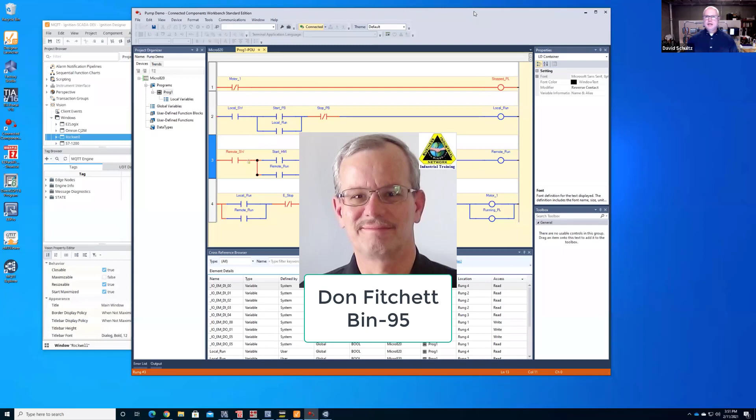So before we get too far into this, just some shout outs. One of them is Don Fitchett at Bin95. He does a tremendous amount of training. I've been linked in with him for over a decade. He's just been phenomenal to help when I have PLC questions or just overall logic control. He has a lot of modules you can just buy for training and the like. So if you're wanting to get into PLCs and learn how to do it, Don would certainly be somebody I would recommend.

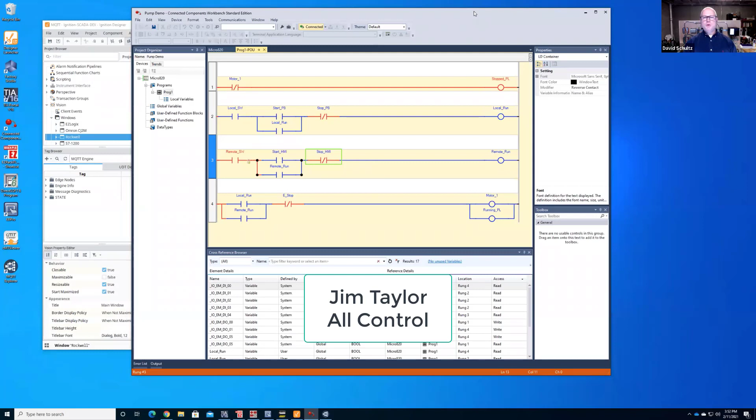I was just going to do four PLCs today. I was able to get an Omron in at the end, a little CJ2M. So thanks to Jim Taylor at All Control - there's actually a client we're working on doing something with, and that's sort of where this solution I'm going to show you is exactly what we're looking at doing with this particular client. But I appreciate them letting me borrow one of their PLCs. And of course, Selam at Opto22 on the Groov Epic.

She's just been extremely helpful in getting some of the stuff done. I'll explain why when we get there, because a lot of your logic control is pretty straightforward. But once you get into how they do it with their strategies and their charts, it's a little bit different animal. Once you get in there and understand it, it's like, oh, this is pretty cool. So that's what we're going to do.

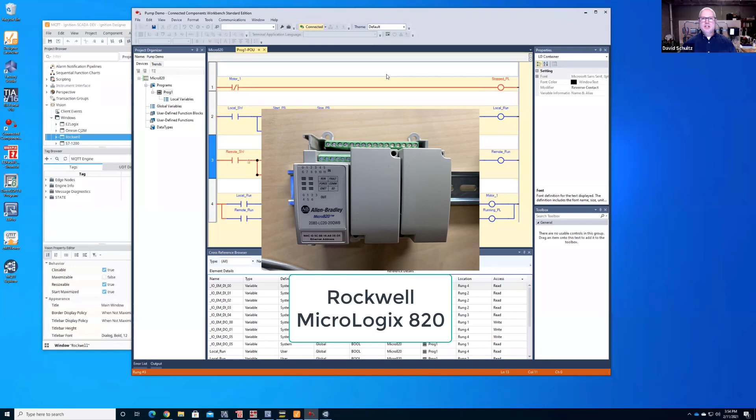So I've started here - this is a MicroLogix 820. What I'm going to do with this is I'm actually running a Kepware instance over here, so I'm now bringing all the tags in through Kepware. It's an OPC UA server. I show this for a couple of reasons. One, there's a lot of people that use OPC and Kepware for getting tags out of their PLCs. So that's how I'm able to connect down to it.

I also want to show it because while I'm going to be publishing everything into an MQTT broker, I want to be very clear that control still needs to be at that OPC UA or directly with that hardware itself. While yes, you can do control with MQTT, it's really not recommended, so I just want to be clear on that.

The other reason why I'm using Kepware is they have this neat thing called an OPC Gateway - or excuse me, an IoT Gateway. That's what we're looking at here. These are the tags that I've actually brought in. So what we're doing is going from that MicroLogix 820, bringing it into Kepware for publishing back out using the Kepware IoT Gateway. I'm going to get these tags publishing real fast.

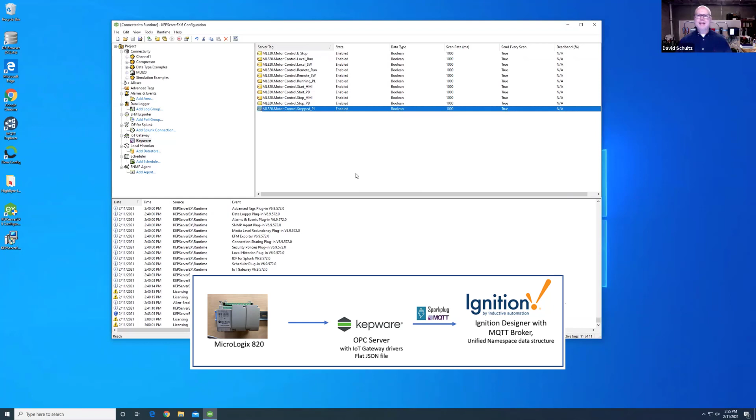What this IoT Gateway does is publish in a flat JSON. It'll take all of this information and give you the tag name, the quality, the value, and whether it's good or not. I'll show you what that looks like when I'm publishing it. I'll do a little Kepware update. Now you can see here's the tag, the value, whether it's on or off - true or false - and of course the time that it came through.

You can see exactly that we are publishing all these. I'll turn this off real fast just so we don't continue to update all that information. Now we're only going to - again, it's report by exception - only publish data changes, so we're only going to bring in the data that changes through there.

What I'm showing you here is that when you actually look at the tag that's coming in - we'll get down here - this is coming from my fictitious Highland plant. Now it's just bringing in this utilities, compressors, and here's the motor. Let me expand this out a little bit - you can see this is a pretty good sized JSON payload that's coming through, and that's the timestamp.

So what I'm doing is bringing it in, running a Python script on this Kepware update, and anytime something changes, you'll get a tag update in through. Not as elegant as some other solutions I'll show you, but the idea is that you can at least get this value published inside a unified namespace.

Coming down, you have your enterprise, your site, you get into the area, kind of a line, if you will, and what we're on - it's just a motor in this particular case. So just one way of doing it, bringing in data, trying to make it available, and it's absolutely doable utilizing that solution.

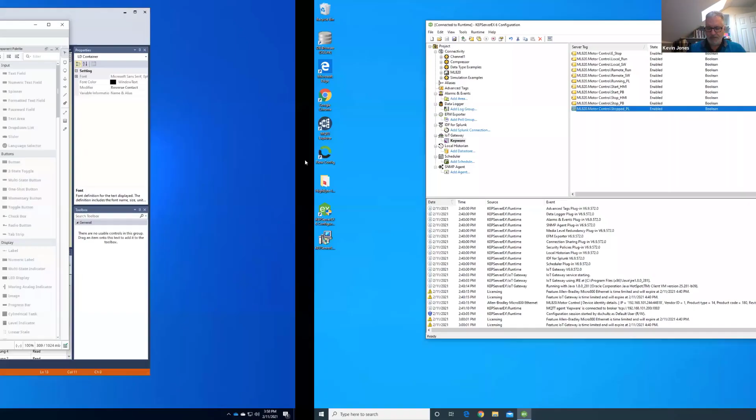And where was that IoT gateway again? It wasn't clear to me where it is. Is it in Kepware? It's in Kepware. And that Kepware is then publishing the flat JSON to Ignition.

Yes, it is. So I'm using just the Chariot SCADA ignition, or MQTT server, right here in Ignition. That's where it's all publishing. And you can see I'm only updating if something should change.

So you see a lot of those tags disappeared when I just clicked the refresh. That's just because this is the most recent data that we have. But you can see that it turned it on, it turned some stuff off, and what the status of everything is. So you can see all that.

And again, it's nice that all of a sudden, through just a JSON, you can keep track of how often a motor cycled through, or did a compressor start and stop, those types of things. And you get those times. You know the exact tag, on or off, and anytime it changes, this will publish that data out to the broker, and you can subscribe to it, and then you'll have that data.

And so I have a couple other questions, and I want to be conscious of time so this video isn't too long for everybody. How many other samples do you have so that I know what level of questions to ask here? In terms of samples, what do you mean by samples?

Like you said, this is sample number one. I have five. Okay. Are they all kind of similar to this, or are they a whole lot different?

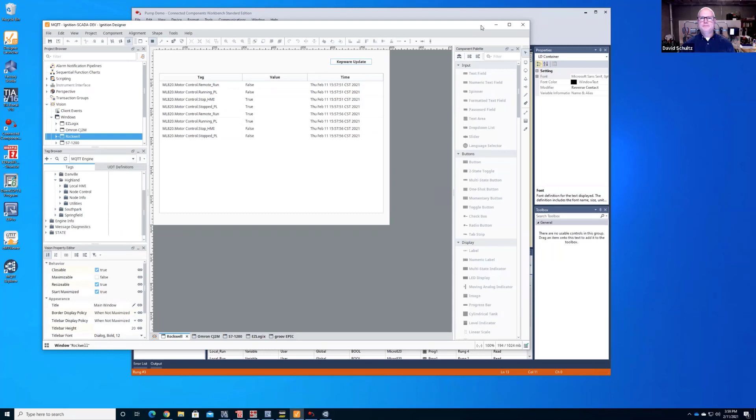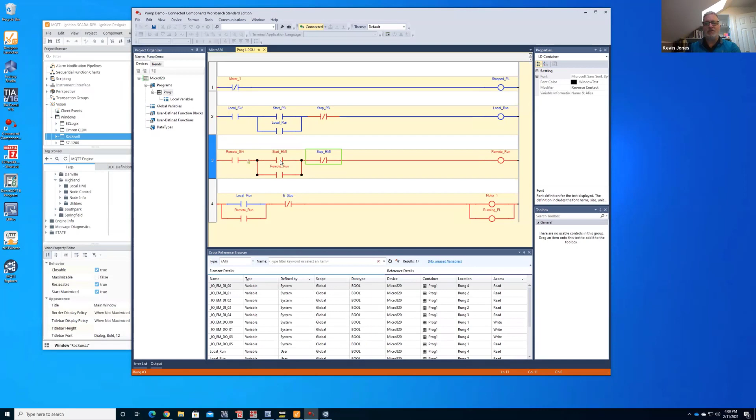So it's how. But then the overriding principle is using these principles that we have around lightweight, report by exception, open technology, and of course there's always a fourth - edge driven. And execute using those as some of the ground rules for putting these solutions together.

Okay, all right, I'll leave more detailed questions for some other time. No worries. So let's go on to number...

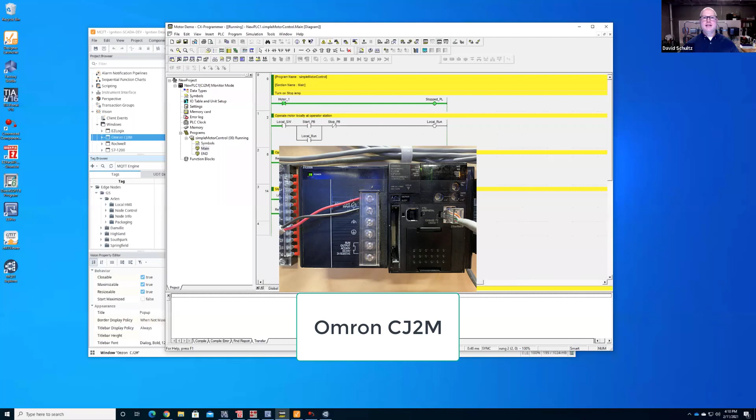So the second one we're going to look at here, Kevin, is I'm using an Omron CJ2M. This is a workhorse PLC from the Omron family, and you'll see it's got the exact same logic structure to it. So the first thing it does is the motors, if it's running or it's not running, it'll say that the stopped pilot light comes on.

I have the ability to do local and remote, and then of course there's the seal-in circuits that get everything to go.

So you can see I can come in here, I can change it so the motor is going to be on. Normally you would just have a push button that would do this. That'll just, the seal-in circuit now continues to run it. And then if I want to turn it off, I can just set that back.

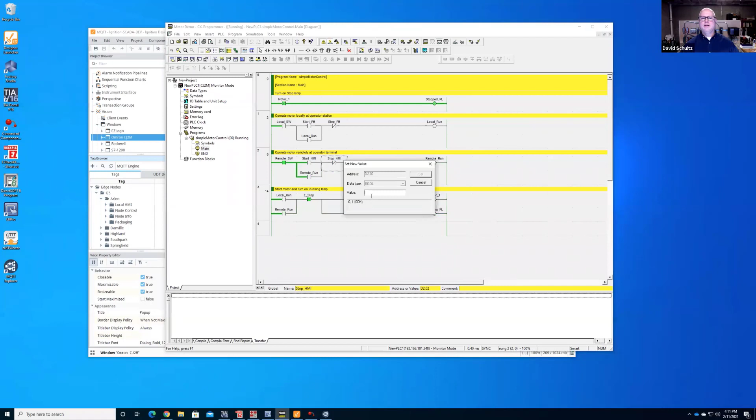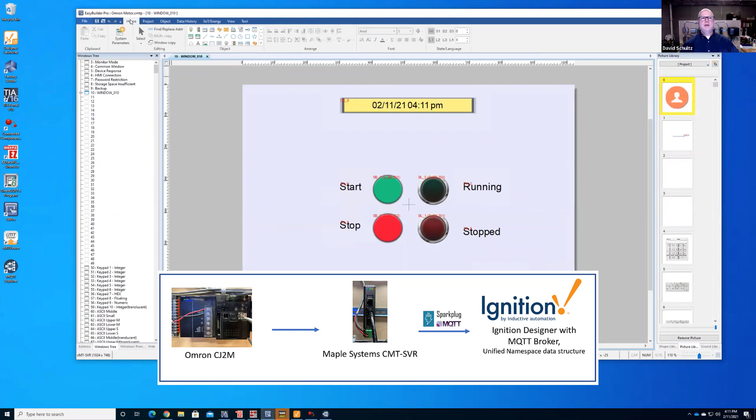So what I'm going to do with this particular one is I've used a Maple Systems CMT-SVR, and it has a pretty extensive list of drivers you can use with these. If you have a lot of old equipment, you can see there's just a pile of drivers it'll talk to in terms of hardware. So we're going to use this Omron driver here, and then how it gets into, let's start with that first.

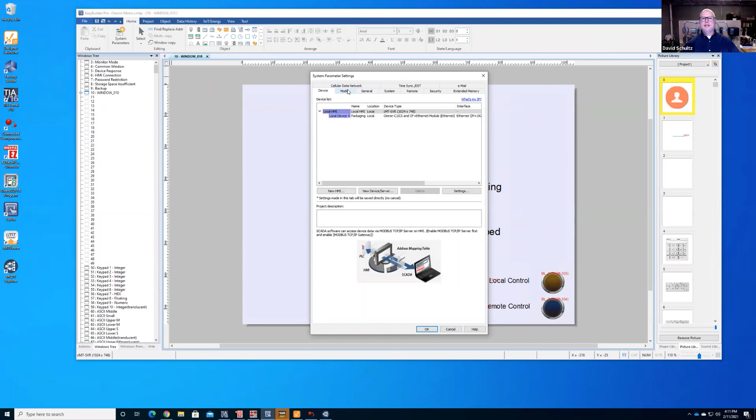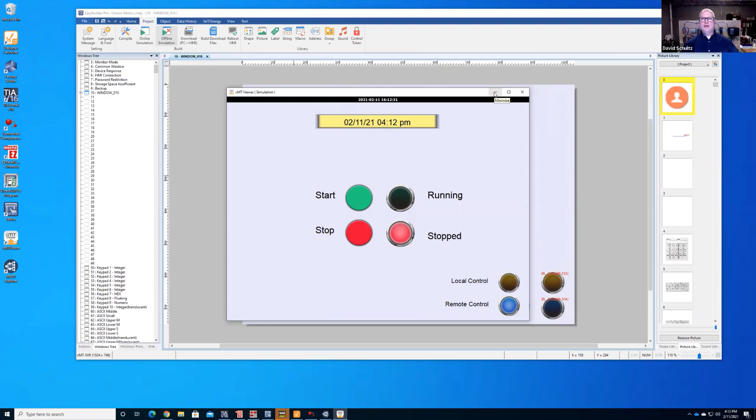So I built a screen here that gives you some basic operations. Go ahead and do an online simulation. As soon as that pops up, it's going to bring in all of the tags. You can see that I'm now stopped. I have the remote control, and now I can hit start, and the motor is running. It stopped, motor stops, pretty vanilla. So this is a good example of using a local HMI for doing the actual control of it itself.

What I was going to show you earlier was that I can also take the Maple Systems and take all those tags that are in that Omron PLC and actually publish them to MQTT. I'm actually using the Sparkplug-B protocol. You can see there's all the object properties. So I'm using Sparkplug-B, and I'm sending it right to the Chariot SCADA.

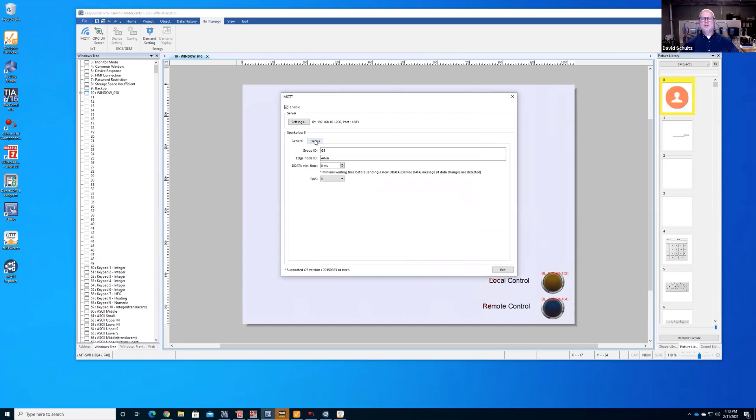MQTT that's right on the Ignition instance that I have. And the group ID, I always use, following through the ISA-95 standard. And then I just take all of those tags that I'm pulling from the Omron, and I'm just publishing them out there. That's all you have to do.

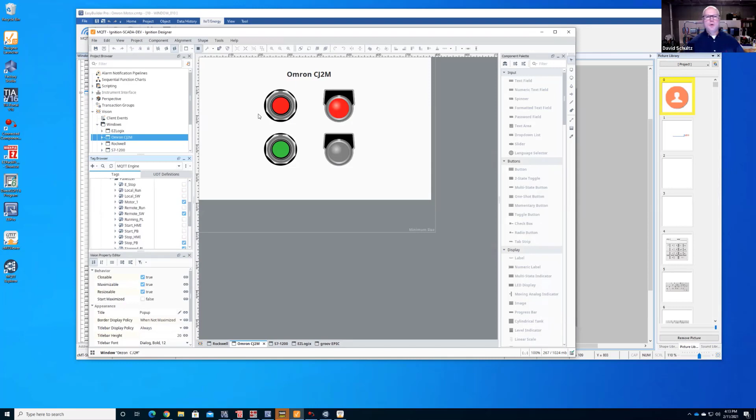So I can come over here to my Ignition instance, and you can see that I have all of those tags. This is at the Arlen plant, sitting on the palletizer. I can see all those tags coming through, and I can actually go in from my Ignition—again, don't want to do control remotely—but I can use that same MQTT, and I can start and stop the pump, the motor. So if you see here, I'm now running.

And if I go ahead and hit stop, you come right back, you see that now everything is stopped. And it does keep track of every one of these.

So if I were to hold down the start button, you can see that I'm actually holding down that start on the HMI, and when I release it, that tag even goes through. So some pretty neat things you can do, but you can also capture anytime somebody actually manually starts and stops it as well. So if I were to hit the actual start push button and stop push button, if it happens to be scanning at that time, I can bring that through as well.

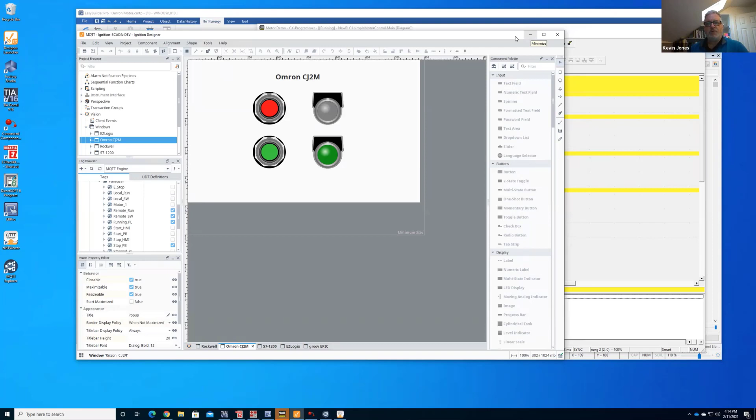So you're running two different HMIs, and you're controlling the one device through two different HMIs, effectively through that MQTT broker? Absolutely, absolutely.

And the sweet thing about MQTT is it's outbound only, so I don't have to open up any ports in order to get this to work. That's just the nature of how that protocol is built—everything is outbound only. So whenever I make a change here, my broker happens to be local, so there would be a little bit of latency, but it'll tell it I have an update and it'll push it all the way out.

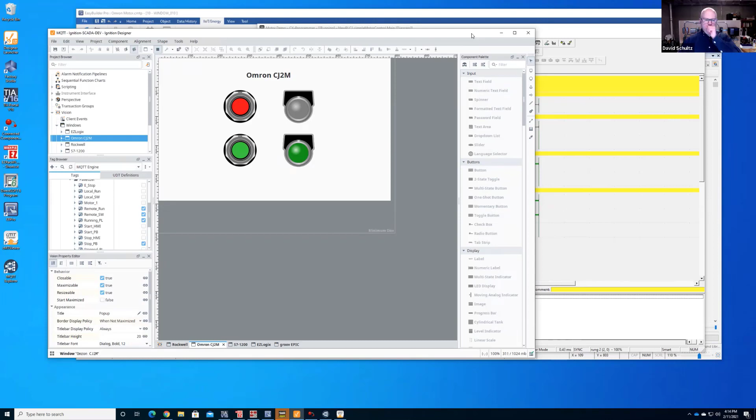So, nice. Of all of these, this is my favorite one, only because there's a lot of legacy equipment that Maple Systems can talk to, and I can publish it right in with Sparkplug-B. I just demonstrated this. This PLC that I'm working with has probably been in the field 25 years.

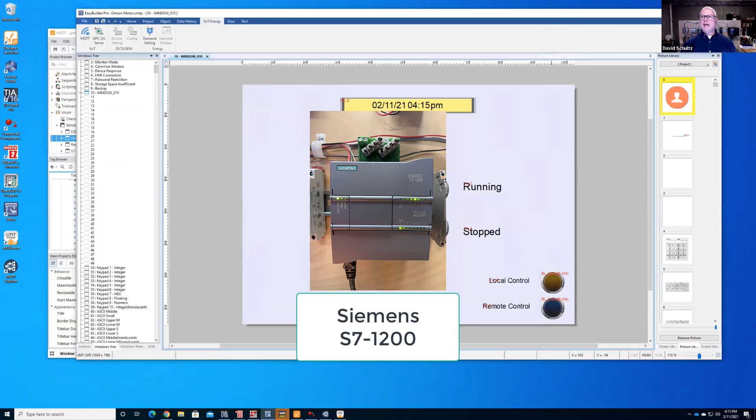So the next one I'm going to work with is a Siemens—this is a Siemens S7-1200 that I have, sitting at my Danville location. Again, it should be a very similar setup doing this. So right now the motor is off. I can turn on the remote control.

I can go ahead and turn it on. So actually my PLC behind me clicked, and then of course this would normally be just a push button. So I'd change that back, and then I can go ahead and turn this one, turn everything off as well. So go ahead and get that turned back on. So exactly the same type of thing.

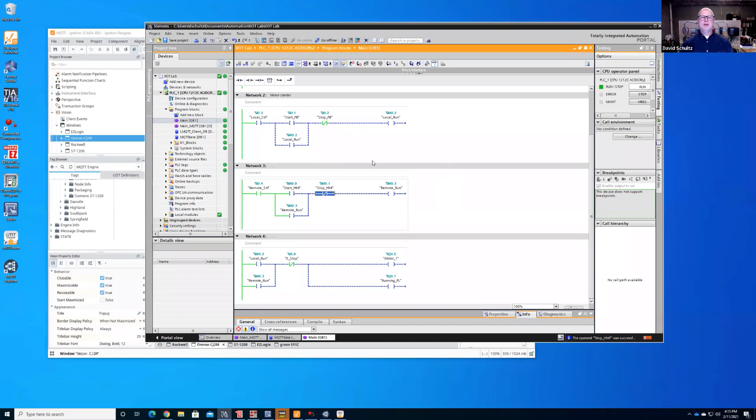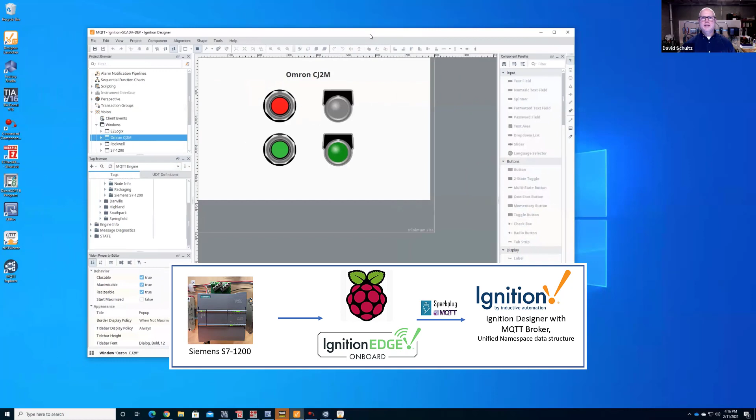So what I'm doing with this is I actually have an edge device. I have a Raspberry Pi that is running Ignition Edge, and I'm taking all of those tags from it, and publishing that through the onboard MQTT Transmission. So it's a very common way of doing these types of things, just using an edge appliance. Just one more way of doing it.

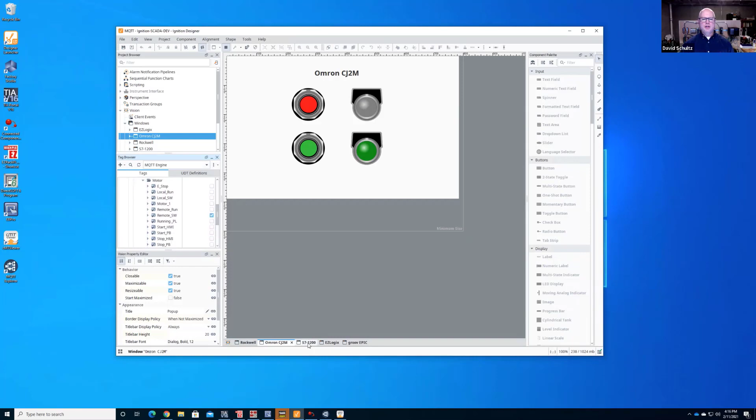So within your unified namespace of having access to all this data in one consolidated location, because all these remote locations are feeding into one area, I actually have access to all of that data going back.

So this one's pretty common in terms of just talking right to it. The S7-1200 is still a very common PLC. It's available, so there's a little more that you can do with it as well. A lot more drivers and devices that'll connect to it, not as much with, say, the Omron or that Micro820.

The Siemens S7 does have a function block that supports MQTT. You get 800 characters that it'll publish out, so you could go through and iterate through all your tags, build the JSON, and then publish it out, similar to what the IoT Gateway was doing in Kepware, and you can sieve through that same type of thing. But again, not as elegant as using something else. I think it's still in development, but again, that's available on board with the S7-1200.

So again, taking a PLC, putting it to Ignition Edge, and publishing it out via MQTT. And of course, you can develop all of the windows right there on site through that edge device as well, if that's something you need to do. So any questions on that one?

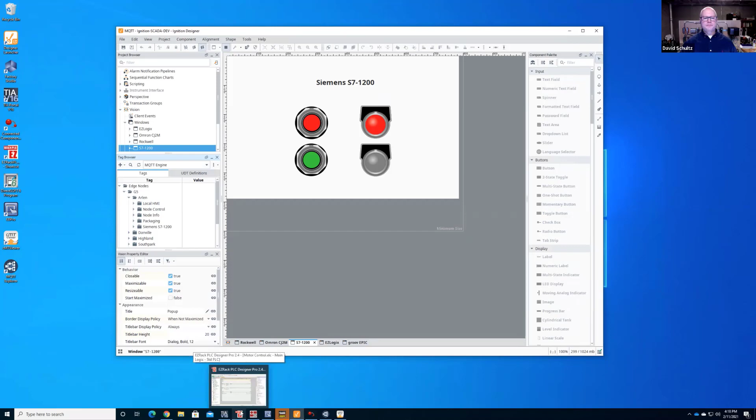No, I mean, you're repeating the same pattern in effect over and over again, just with different devices, demonstrating the different devices. So you go to Siemens S7-1200, or maybe I do have a question.

But you are also using a Raspberry Pi with Ignition Edge. So where do the two come into play as you're pushing the data out to the data broker in Ignition and then showing that and controlling that with the HMI and Ignition?

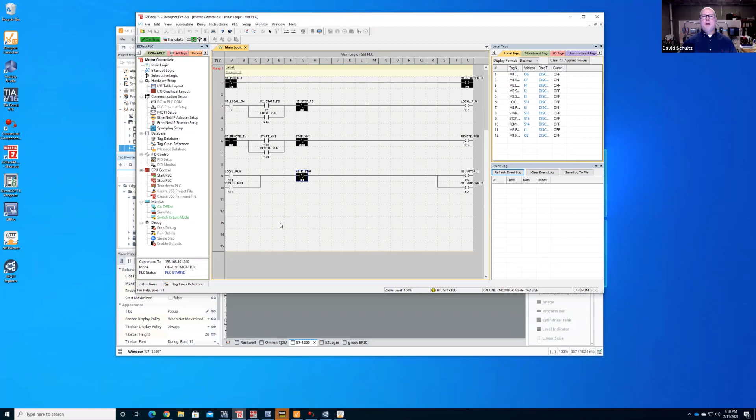So yeah, the Raspberry Pi is sitting on the same site. It's sitting right next to that S7. So architecturally speaking, it's at that remote location. I'm using Raspberry Pi, I have the drivers within Ignition pulling the tags right out of that Siemens, and then I'm also using the MQTT transmitter and publishing those tags to an MQTT broker.

So you're using the Raspberry Pi as an edge device connected to the Siemens to pull the data out of the Siemens. Yes. Thank you, yeah, it's a great clarification on that.

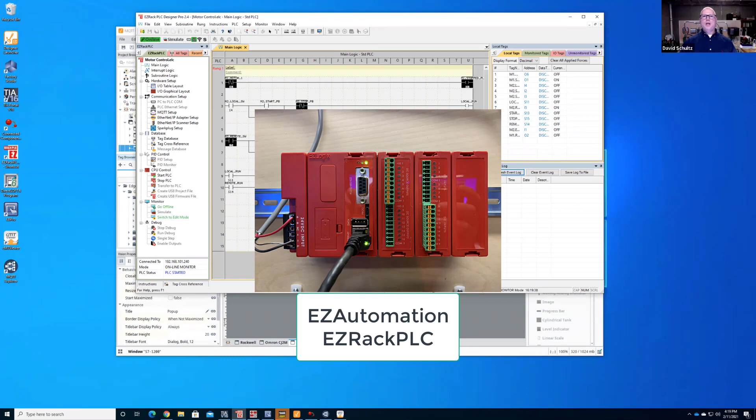So again, now we're looking at something that's a little bit different. This is definitely a piece of hardware that is Industry 4.0 ready to go, and this is an EZRackPLC. They actually have a Sparkplug driver right on it itself. So EZRack, they have both PLCs and HMIs, and you can do all the same control would be there, the PLC, you need to have a local operator that's connecting through it.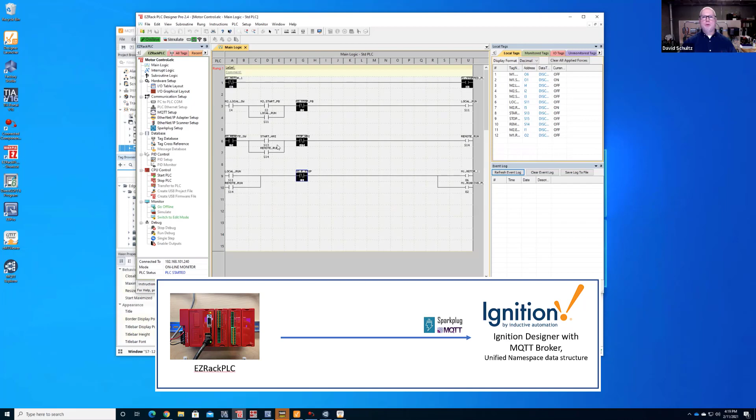But what's nice, again, I don't know if I need to demonstrate the functionality, this motor is going to do the exact same thing. But you can come right in and do your Sparkplug B setup. So you have your client ID, you give it to your unified namespace.

So here in the Springfield location, we're in their fermentation area. And then I set up what the brokers are, get that all set up. And then all the tags, all I have to do is publish what tags do I want to do. And I can actually bring in that unified namespace exactly how it is. Tank 103 on pump 1 filling it. There's all the tags that are available to me.

Anytime I make that change, let's go over to the Mosquitto broker. I can pull up the EZRack screen and you can see that I can start and stop that motor, just like I can.

Again, the point isn't to actually do remote control for all these devices. The reality is that since I've built this out properly, we're now at the Springfield location. I can come into my fermentation area, go to tank 103, go to the charge pump that's on it, and I have all those tags available to me. So when I start it and stop it, it does all the same thing.

So, variation on a theme, but if you're looking at older technology that you'd like to replace with some new stuff, this is something you want to consider. Starting from a technology-first standpoint, we want a PLC that is going to support MQTT and Sparkplug B. There's many other considerations you'd want to have, but this is something that EZRack does, so I don't have to do anything with it. It's all ready to go.

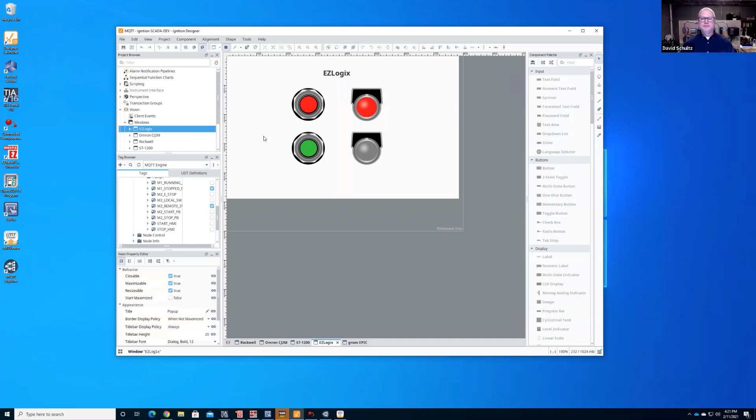So the UNS, the unified namespace, that came out automatically, how was that created? Can you just review that? Where's the other screen you were showing?

So when I go to my EZRack PLC setup, or my spark plug setup, I can bring in all of the tags available to me in that PLC, and I can publish them exactly how I would want them to exist inside a unified namespace, or at least how it would look in this particular instance. Where did you do this in the PLC designer? Where did you set up that structure?

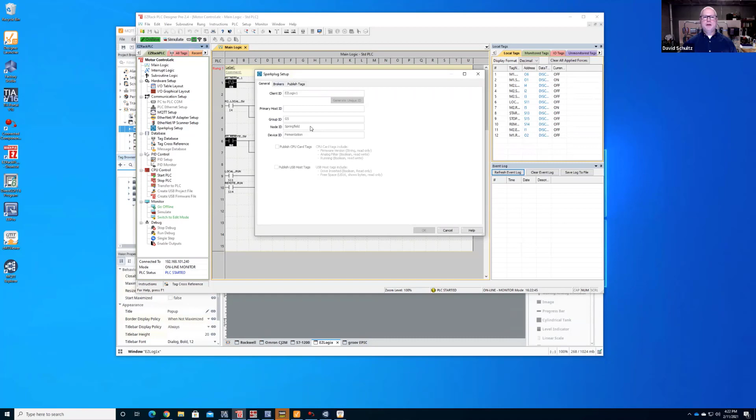So I'm in the PLC, the development environment for the EZRackPLC, and there's just the communication setup. If I go to Sparkplug B setup, this is where I give it the general setup, using my group ID, node ID, and device ID. I happen to use those three for the enterprise, site, and area. Then over where I publish the tags, it automatically fills those in, and I can even get into line and cell, if you will. So, again, it's on tank 103 in the fermentation area, and I'm pump 1, so it's coming into that particular tank.

So then for each development environment, for each HMI, each development environment for the logic for the PLCs, you have to identify where you're going to put each of these components - enterprise, plant, etc. - for the UNS structure, and then put them in. It just creates it from there, and then you're pushing.

Yeah, exactly. Now, again, if you were looking at a complete development environment, it's something that you might want to create your entire unified namespace for that actual location, and then just have a folder for, say, MQTT tags, and that's where this would go. I'm really just demonstrating this to show that you can publish this data right to a unified namespace using that hierarchy that would make sense.

But it's more likely you're going to build this within your plant itself and then publish that. That's actually something we're going to take a look at in the near future - actually building one of those for a site and then publishing it into an enterprise. We're going to take several individual MQTT clients or brokers and publish that using a bridge connection, putting it into a cloud MQTT.

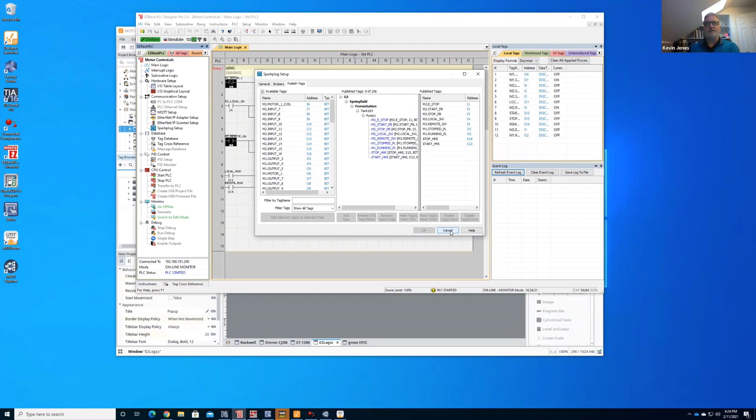Nice, great, awesome, so that's what we're going to look at. Again, just going through, we had a Rockwell PLC, put it into Kepware, went into their IoT Gateway, and we just published a flat JSON. It does give us the same information. Second one we did was that Omron PLC, went into the Maple Systems SVR.

We're able to do all the control there from that particular unit, as well as publish MQTT in that SparkPlug-B format, so it's available within other systems. And then again, we had the Siemens S7 using a Raspberry Pi running Ignition Edge, so you can do the control right from that Edge device. And then it also publishes into the MQTT broker, and you now have all that information available however you want to consume it.

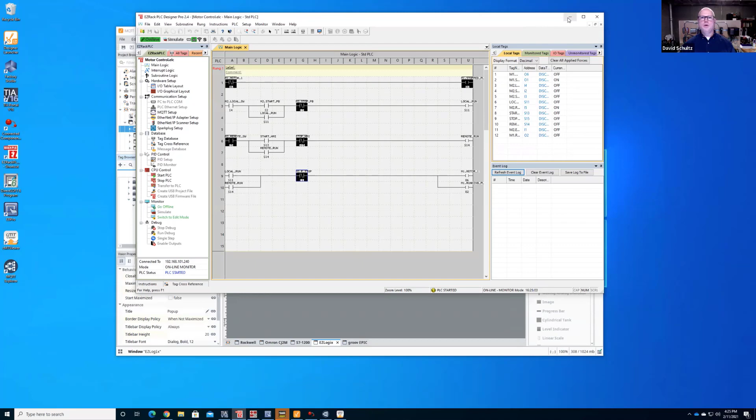And you did the EZRackPLC. Then the EZRack's the one we just visited here. This actually has SparkPlug-B built into it, so I don't have to do anything. I just build my project, and then I am off to the races. I can take all those tags and publish them right out if that's how I choose to do it. So they're pretty darned inexpensive too, so something we want to take a look at, functionally speaking.

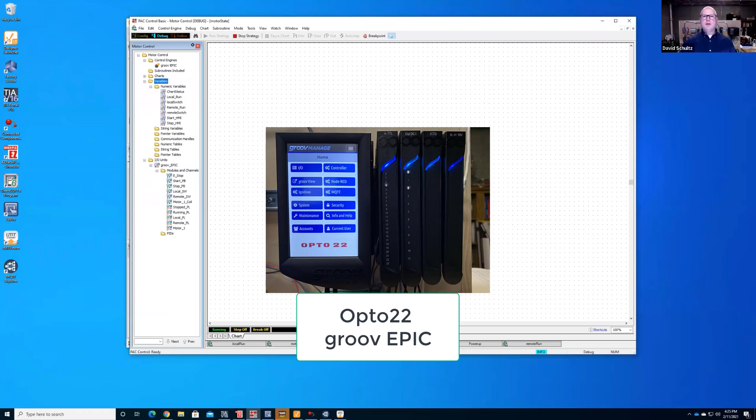All right, so now we're going to come to the Opto22, the Groov Epic. What's fundamentally different about how they do their programming is that instead of using ladder logic, they actually create these strategies, and then they create these charts. A chart is just a visual flow diagram of the logic you want to run through. Every chart starts with this power up chart that just starts everything, and then you give it the next signal, the next flow, to go ahead and start the charts.

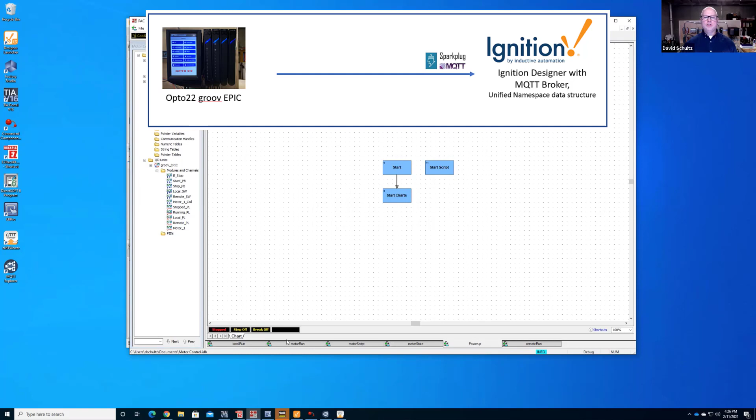So what I've built here is that I've broken down each of those rungs that existed in the other PLC programs. It's running all of these charts at the same time. The first thing it's going to do, if the chart is going to start, is check to see if the motor's on. If it is, I'm going to turn the pilot light off. If it's not running, I'm going to turn the pilot light on, and it's just going to continue to run this particular chart. Next it's going to start the chart.

It's going to see, am I in local mode? And then you can just follow it through. If it is, it turns the local pilot light on, or it'll turn the local pilot light off. Then it's going to look for the stop push button, and it's going to look for the start push button. And then it's just going to continue to loop through that exact same scenario.

Remote is the exact same thing, but instead of looking for an actual IO change, it's going to come in and see, did the IO change for that? Are we in a remote operation? Then I can start and stop it with an HMI, and it'll do the logic there. It'll solve for that and just reiterate it.

And then finally, using that same bottom rung with all the seal in, it's now going to say, can I run the motor? Meaning, is one of these states true on the others? Is it time to run the motor? And before it does anything, it's also going to check to make sure my e-stop is off. Is that emergency stop there? Otherwise, it'll turn the motor on, and it turns on the running pilot light as well, and it'll just continue to run this flow.

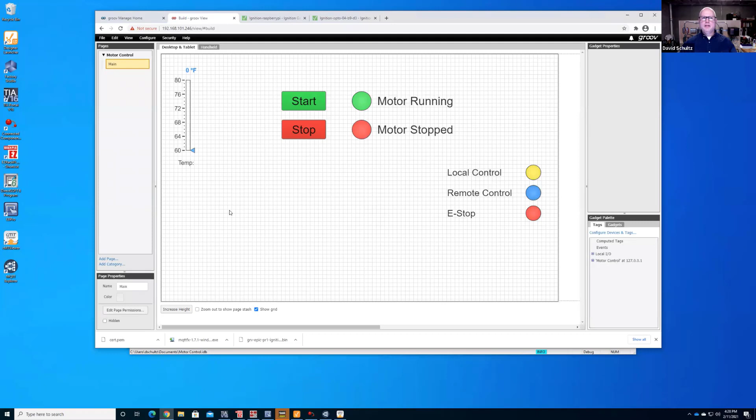So we're going to go ahead and start the groov view itself. And you can see I have all the exact same lights that you would expect to see here, but I actually have this wired into some IO. So we're actually going to show that I can turn this on, and I now have local control. You can see that my yellow light is on my controller.

I can take the green button, I can start the motor, and now you notice that the light changes. It's still in local control. Now I do have a blue button for doing the shut off because I didn't have all the ones that are there. So go ahead, I can stop the motor as well.

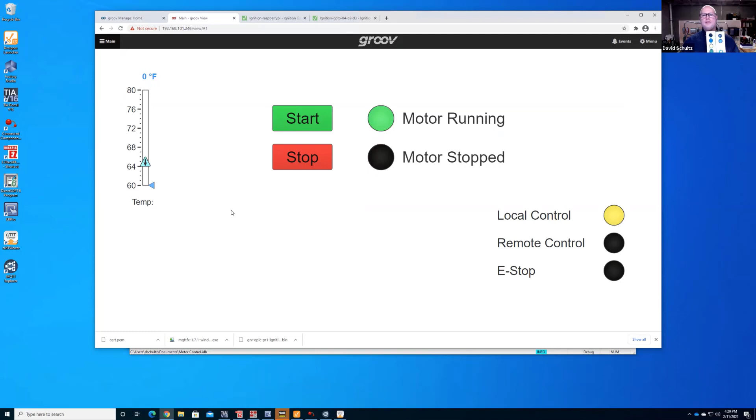And then of course I do have the e-stop, so we'll go ahead. Not as easy to do when you're trying to do it with two hands, but I can actually get the motor stopped as well. So I can get that all the way in. So now the motor's stopped.

What's that? No, so can you juggle a mouse, a computer, and input devices? How much can you do?

Yeah, I'm showing that. So now I'm going to put it into a remote mode. So you can see now the remote mode's on. Motor is stopped. And now that I'm going to control it with push buttons, it's a little bit easier to do. Just hit the start button, and the motor's running. Hit the stop button, and the motor's stopped.

That is really cool. Yeah. Doing a lot of really, really nice stuff with this.

So if that wasn't enough for you, you also have the ability, remember we talked about doing Node Red? But wait, there's more. So you have Node Red you can do this in. I didn't build any of the flows, but I'm just demonstrating that you can do stuff with all of this. It does have all those same Epic inputs down here. So all the Opto22, you can pull in all of that IO that you want to use utilizing Node Red.

But if that wasn't enough for you, it also has a built-in ignition instance. And so we have a set of knives for you. Yeah, so it has onboard ignition where I can actually develop this particular project, taking all that IO and all those variables, and there's a driver that it brings in similar to it.

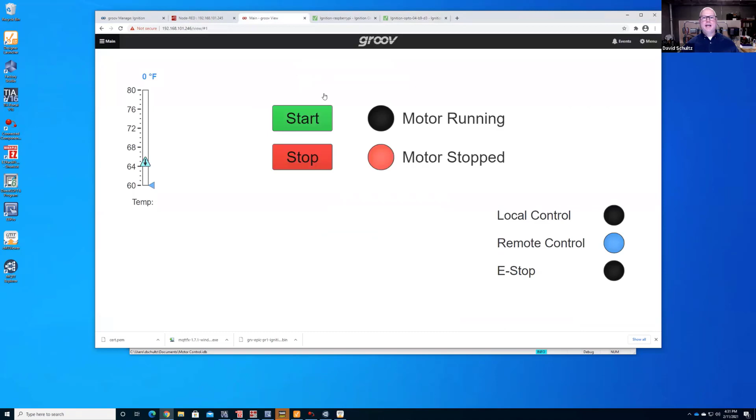So I can actually do all this remotely as well. So I can come over here to my project, and again, here's my groov Epic. And there's actually a couple of ways that this has come in. Let me get to my, so this is at the Southpark location. So I can come in here. I pretended this is a refinery, so we're out in the alkylation unit.

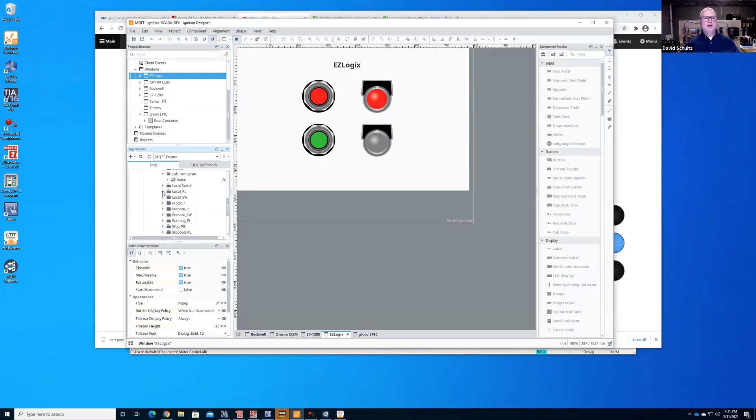I'm actually using the Opto MMP, so this is all of its onboard. You have all the channels. You can see all your e-stop and all your pilot light. Let me move this over a little bit. So you can see lab temperature, it's 20.3 degrees C in here. And you can expand out all the same IO that's there.

And then, of course, I did create another connection into the PAC configuration. I'm bringing in all that logic and that control. So you can see I have all the same kind of data that's coming into it as well. So again, as you would expect, I can come in here, I can start it.

And now it's not going to work for me yet. Oh, I need to run the strategy. All right, it's back on. Well, this was working great earlier, and I'm not sure why it's not.

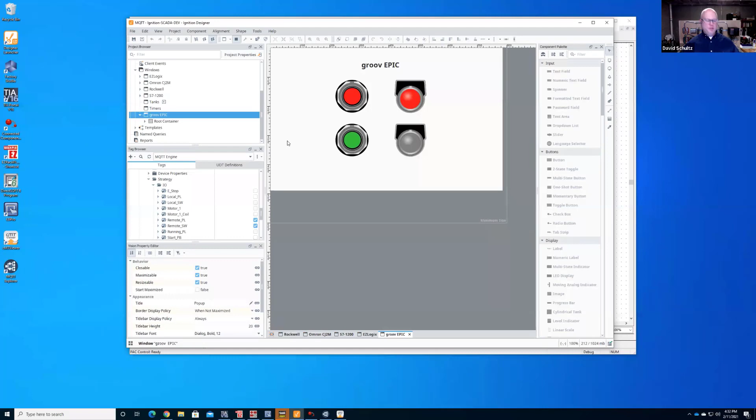But nonetheless, we get the idea. We get the idea. Yeah, right.

So, again, the whole point is that, here's how you teach an old dog new tricks. Here's how you take some existing hardware that's out on your manufacturing site or even remote. There's several different ways that you can connect everything together, and then you can bring it into a unified namespace. We now have access to all that data. Again, using all the core principles of the open architecture, lightweight, report by exception, edge-driven, and all of this information is there.

Yeah, again, like I said at the beginning, I really like the idea, the fact that we're using these newer principles for creating really good IoT strategies and solutions for a lot of the flexibility, scalability, for getting that one version of the truth out to everybody for that visibility into the plant. And at the same time, you're enabling this with existing technologies.

That's something we're working with for some clients right now. They've got 4 or 5 different models of Rockwell automation PLCs, and RSLogix/RSLinx isn't cutting it anymore. We need to at least replace that with Kepware to pull the data out and then push it into HighByte and an MQTT broker to really get the data where it needs to be, and that's going to save us a ton of time versus older technologies.

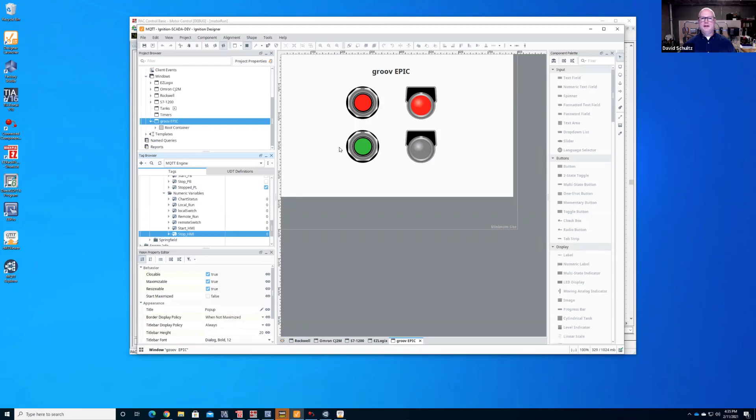So I am able to control this thing just by manipulating the tag value itself. Apparently there's a little action item behind that tag - even though I had set it up and it was doing its thing, something has changed since then. So yeah, a lot of different stuff we can do here.

I guess there's one other thing on this groov that I wanted to show you. But wait, there's more. Yeah, but wait, there's more.

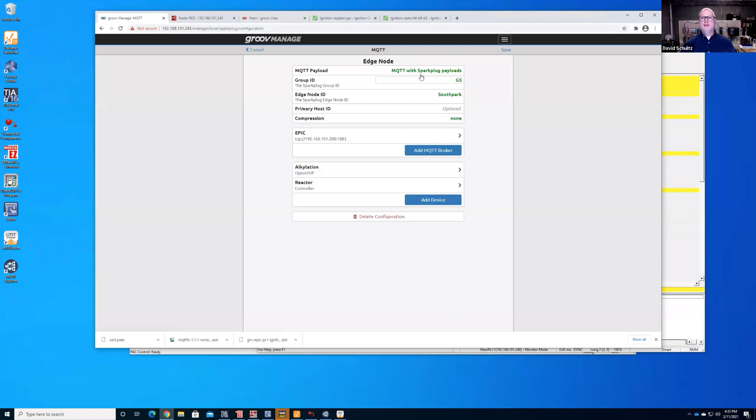So I mentioned Ignition - again, there's an MQTT broker that's built right into it as well, so that's where we're getting all the payloads. Similar to the EZRackPLC, you're able to publish right to it. And of course, it also has a Sparkplug feature, so if you wanted to use Sparkplug to do all this, it supports that as well. I haven't done anything with it, just pointing out that it's there - it's just another way of doing it.

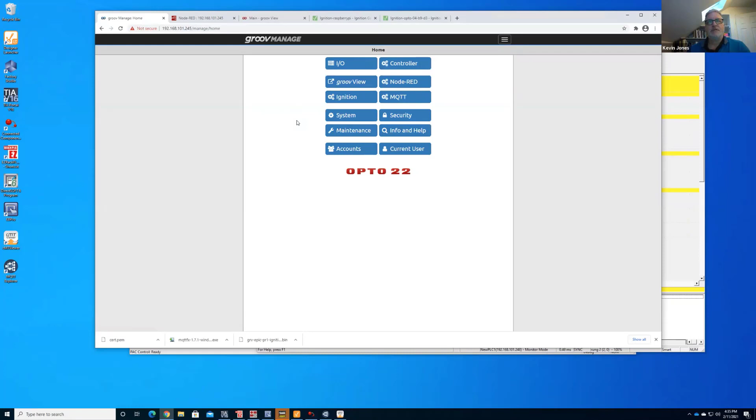So the groov device has an actual MQTT broker inside this device that's at the edge, so to speak. Yeah, absolutely - getting back to that idea of the flexibility of the brokers, where you can have them at the edge, on the line, at the plant, at the enterprise, and they can all publish. It's all based on whatever kind of problems you're trying to solve as to which ones you set up.

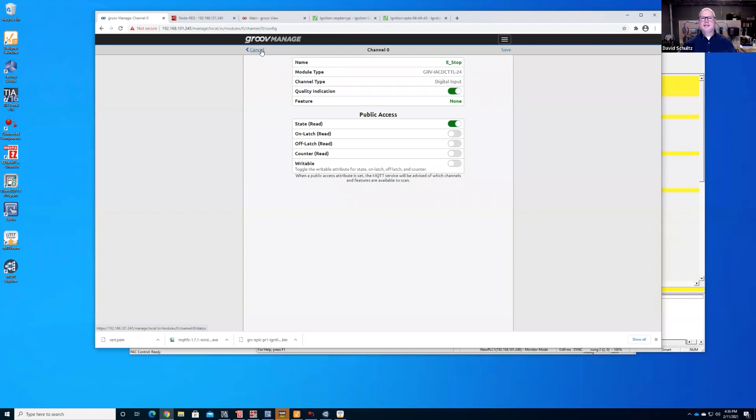Yeah, and you just have to say, do I want public access to it or not? You say, yep, I do, and then it just publishes it right out. And then of course I like it because it's got a wiring diagram built right in, so when you're going to wire everything, it's pretty slick. Just a lot of functionality and flexibility to it, and it's actually priced pretty darn competitively relative to other PLCs available on the market.

So a lot of different ways we can do something, but you don't have to get rid of your existing hardware - you can already use what's there. But if you decide that, yes, technically speaking, we're due for an upgrade, these are some of the things you should consider in terms of how you do that.

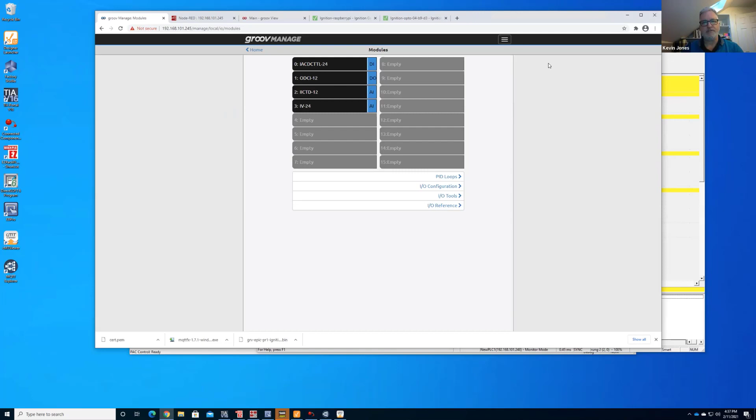Amazing flexibility. And this is also the kind of solution you can start to implement incrementally. You don't have to do all of this for all of your PLCs and all your devices - just do a couple. Do an area, do a cell, a line, and then more later.

So going back to this Omron one, we're just going to start with one machine. There's a whole different program that runs with it, but all we're having to do is plug in this Maple Systems - we're going to use an SVR, actually a 200 for that. It's got Wi-Fi built into it, but it'll connect right into that Omron PLC, pull the tags, and now they'll have what they're trying to get at - they want to be able to remotely pull some data off of their machines and see what's going on.

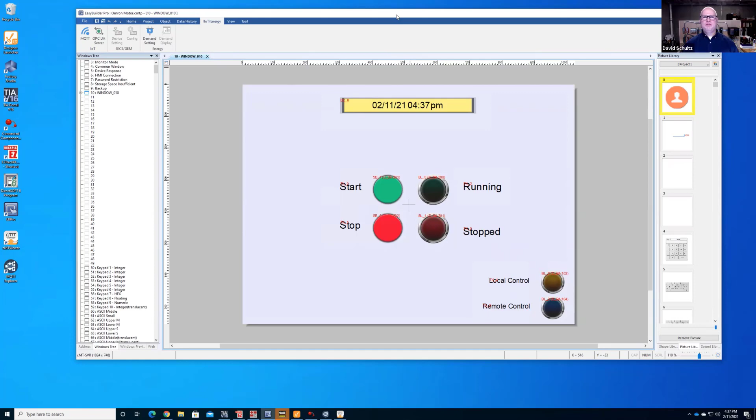So that's what we're doing there, but it's $300. Wow, priced right. Crazy levels of flexibility. Absolutely. Scale for the future. Good stuff. Wow, anything else? Come on, don't you have something else?

Yeah, no, I think that's pretty well it. That's enough. Yeah, I think it's enough. Definitely is enough. I hope it's enough. It's plenty. It's more than enough.

So you've gone through five examples, and again, like you had said, just demonstrated how to pull the data out of older devices into the new architecture, following these strong principles for IoT strategies and best practices.

Yep, yeah, awesome. Great stuff, Dave. Great stuff. Oops. Cool, turn off.